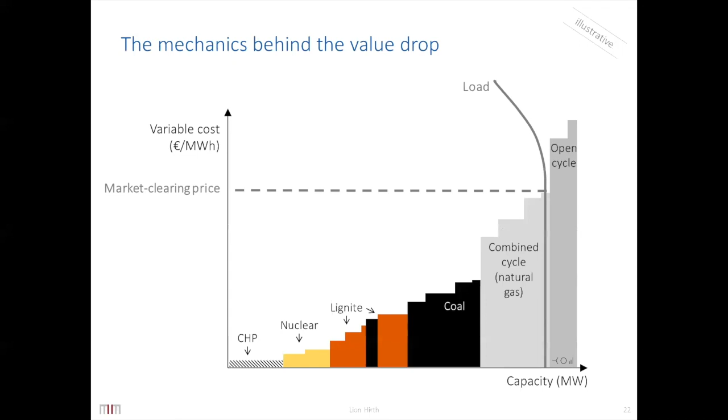If in that hour of the year additional wind supply comes into the market, the net load—which is load minus wind and solar generation—is reduced, and this net load is what needs to be served by conventional power plants. With reduced net loads, the price is reduced. Whenever wind power is added to the market, in that specific moment of time, the price is reduced compared to the same hour if there wasn't any wind.

Systematically, wind eats up its own price, an effect that my former boss used to call the self-cannibalization effect. I'm not sure if that's the nicest term, but in essence it's just simple economics: if you increase the supply of a good, its relative price goes down. In this case, the good is wind or solar energy, which makes it a little trickier to observe.

Obviously, the shift is larger if you have more wind turbines installed in that region. So whenever more wind power is installed, the stronger the shift of the price decline in windy hours is, and that results in the pattern you've seen—that on average over the course of a year, income declines with higher average penetration rates. So far, the bad news.

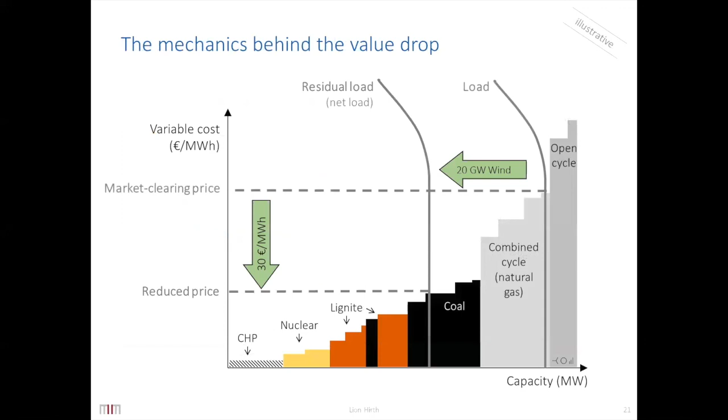I said if you extrapolate that linear trend, the picture would look pretty bleak, but extrapolating a historical trend is something you should never do if you want to make sensible decisions. So what we did to understand how this pattern evolves in the future is use a very simple numerical electricity market model that covers these regions.

It's a pretty simple but relatively standard electricity market model that also models investments—so it's a greenfield model. Under certain conditions, the model determines the cost-optimal electricity mix for Europe, both in hourly dispatch and investment in power plants. The model is open source, so you're invited to have a look and run your own model runs if you want to verify what I'm going to say.

What does the number mean? It means that at 30% wind market share, the value of each megawatt hour of electricity from wind is 40% less than the value of the first megawatt hour, when there was only one single wind turbine installed. That's quite a dramatic decline.

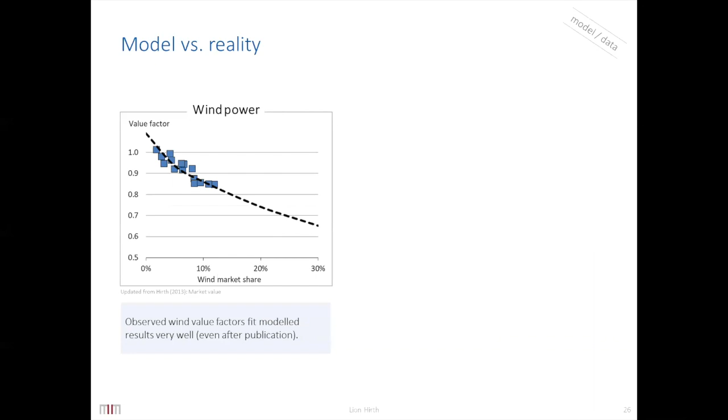Where does the difference between wind and solar come from? Sorry, there's a slide I didn't bring. But there are obvious solutions to that problem, if you perceive it as a problem.

Electricity storage is one solution. It's pretty clear that if you had unlimited electricity storage at 100% round-trip efficiency, electricity prices would be flat all the time—there wouldn't be any price fluctuations, because if there were any, people would store and generate electricity to make them go away. But we don't have unlimited, priceless electricity storage at 100% efficiency. Storage is limited, costly, and has losses.

So what we did was test the impact of doubling Europe's existing pumped hydro storage capacity. We ran three model scenarios: the first with existing capacity in place, the second with no storage capacity at all, and the third with double the existing capacity. The impact is as expected—if you have more storage, the value of wind (or in this case solar and wind energy) is increased.

But the key point here is that the impact is relatively small. So even if you double existing pumped hydro capacity, which is quite an investment, you still have a relatively limited impact on the value of wind energy. If you increase interconnection between countries, you get a similar effect, a little more. That's of course because there's geographic smoothing effects. Sometimes there's wind in France but not in Finland, and sometimes in Sweden but not in Switzerland. So if that can be traded more easily, things are smoothed out, which is good for the value of wind energy. But still, overall, it doesn't qualitatively change the picture.

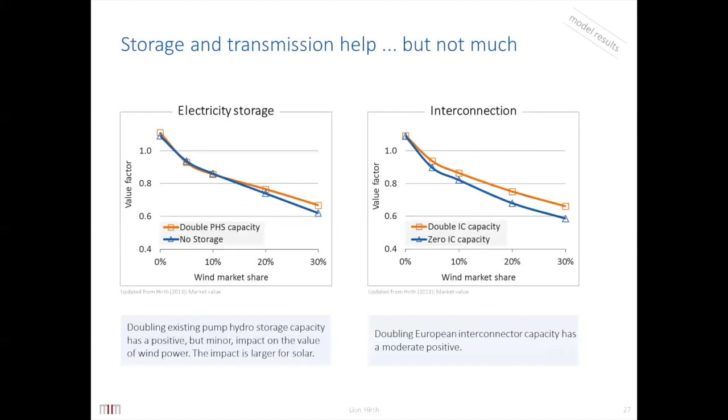Is the average value factor across all energy sources equal to 1, and therefore, as wind and solar lose value, are there other sources gaining value, and if so, what are those? It's not exactly 1, it's a little higher. The average is higher than 1. You would get a value factor of 1 if you had a baseload plant that runs 24/7, so a nuclear plant has a value factor of almost 1. But because there are peaking plants in the system that disproportionately produce at times of high prices, a peaking plant might have a value factor of 2 or 5 or maybe even 10. So the average is slightly above 1, maybe 1.1 in this region.

So that's essentially a storage technology, right? I mean the fuel is being stored, so it's a different storage technology that's winning the market from a value standpoint. You can see it like this, yeah. Depending how you define storage, but yes, in the sense you phrased it, yes.

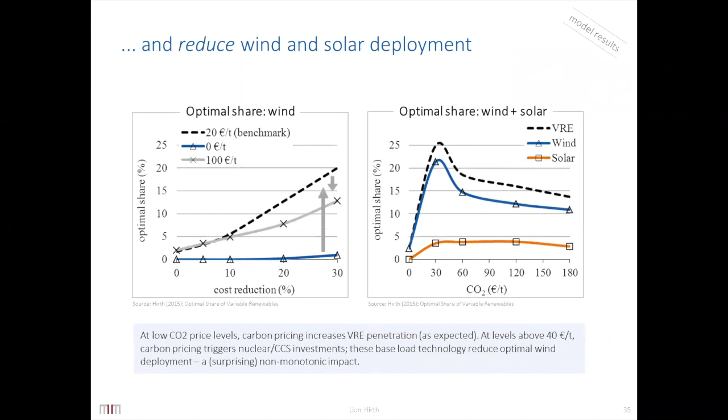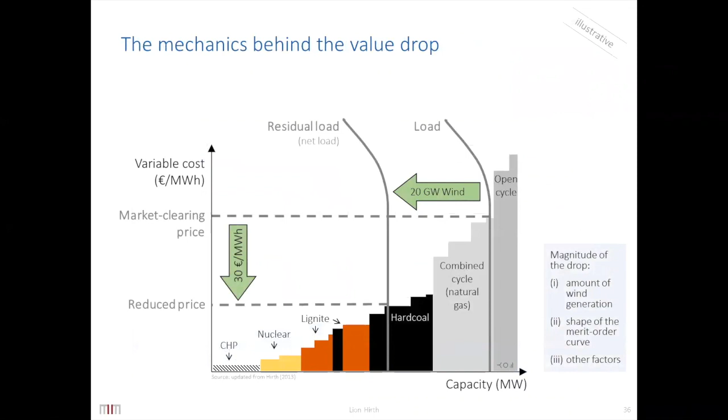Of course, if you look at this slide more carefully, the size of the price drop for a given volume depends on the shape of the supply curve, right? If the supply curve is very flat, there's hardly any price drop. If the supply curve is very steep or very convex, then the price drop is larger.

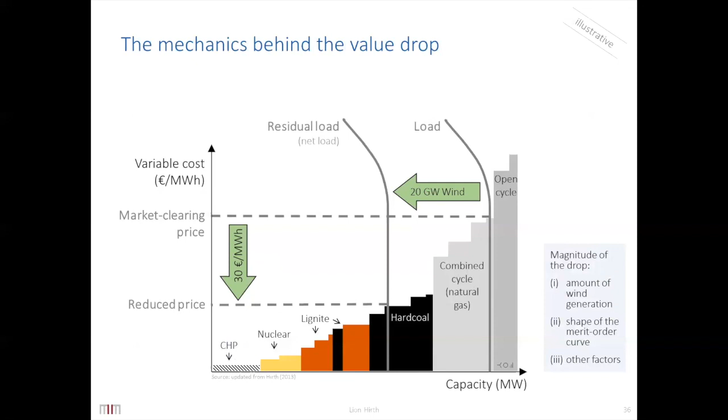So what happens in the model if you include a carbon price of 100 euros per ton? Recall that this is a long-term model, so it models the entire power plant fleet not as it is, but as a greenfield model that finds the least cost power plant fleet for a given assumption set, including carbon price. If you increase the carbon price to 100, nuclear power becomes competitive, which really wasn't before. So at 100 euros, you have a large nuclear fleet, and nuclear is very investment intensive but relatively cheap to operate, so it has low fuel costs.

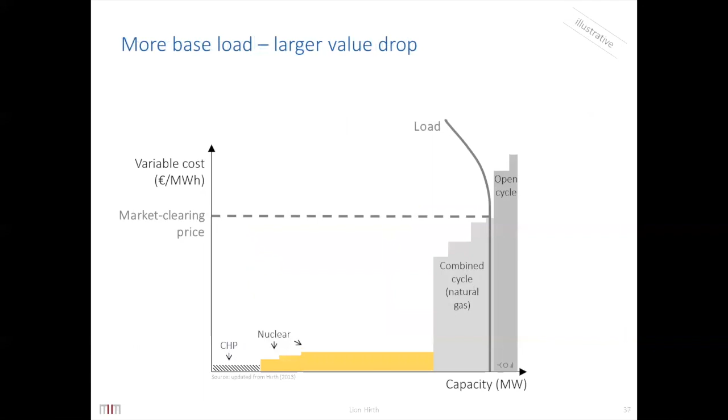So nuclear plants would bid at their fuel costs, and at the same drop in net demand that you saw before, this would lead to a much starker drop in prices because variable costs of nuclear are so low. This has that surprising result that the market value of wind is reduced by introducing carbon prices at high levels.

But of course, that mechanism rests on the idea that you can actually install nuclear power plants and that they will be built as a response to the carbon price. If it's not nuclear, you could also pick carbon capture and storage. CCS has similar cost characteristics, or more broadly, any other type of generator that's investment intensive but relatively cheap to operate. Any such low carbon baseload plants built as a response to a carbon price can have a negative impact on the market value of wind energy. That's a surprising mechanism I wasn't expecting, at least.

Put differently, wind and solar as variable electricity generators do not really go well hand in hand with baseload plants that need to run 24/7 to be economic. They go much better with generation technologies that are less capital intensive. Unfortunately, there aren't many of these less capital intensive, low carbon technologies available. Maybe biomass, maybe natural gas with CCS, but the options aren't great.

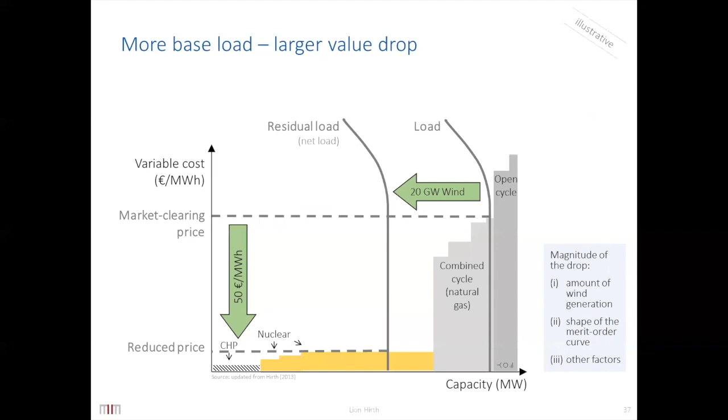Let's talk more positively about what we can do about this. There's a lot of things that can be done to make this value drop less dramatic, to mitigate it. This is grouped into two parts. First, things at the level of the power system and market to make it more flexible, to accommodate larger volumes of wind and solar — demand response, storage, more interconnection, making thermal plants more flexible, shifting the generation mix towards less capital-intensive plants, market design, and using flexible hydropower to the extent it's flexible.

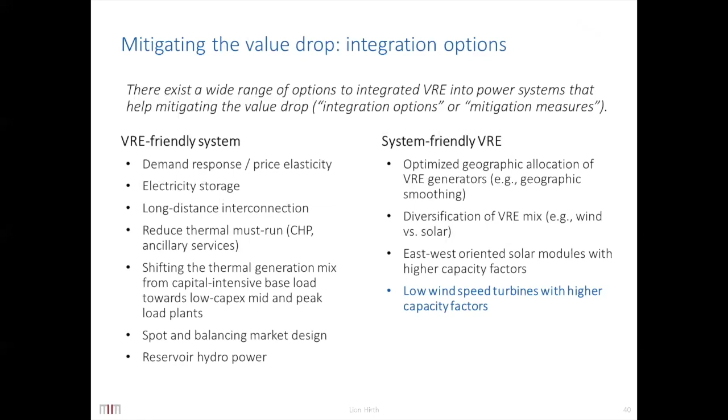And there are options at the level of the renewable energy technology and asset to make the renewable energy asset more system-friendly. One is changing the geographic location and diversifying the mix — having a mix of wind and solar rather than only one is obviously going to produce better results. But here we want to look at something less obvious: so-called low wind speed turbines that have higher capacity factors. So what is system-friendly wind power?

First on that terminology: we call these system-friendly renewables because they reduce what some people call integration or total system cost. Expressed differently, they increase the economic value of the electricity produced, and as a consequence might reduce the cost of support policies to deploy these technologies.

So what is a low wind speed turbine? It's a turbine that combines two characteristics compared to a classical turbine: lower power and a larger rotor per unit of installed capacity. Think of two turbines you can actually buy on the market — this isn't fancy future technology. You can call Vestas, Siemens, or Enercon and buy these. I'm comparing an Enercon E-82 with installed capacity of 3 megawatts and the Vestas V100 with 1.8 megawatts. You could pick other turbines; these are just examples.

These turbines placed at a certain location in Germany would roughly produce the same annual output of electricity, so in that sense they're comparable. But they are different: the Vestas has a smaller generator but a larger rotor diameter, while the Enercon has a smaller rotor and a larger generator. Whenever it's very windy, the Enercon can produce at full speed, 3 megawatts, while the Vestas can only produce 1.8 megawatts, its rated capacity. If it's moderately windy, the Enercon is limited not by its electrical capacity but by the amount of energy that can be harvested by the rotor size, and the Vestas, having a larger rotor, can harvest more energy. So the Vestas produces more energy at moderate wind speeds, and the Enercon more at high wind speeds.

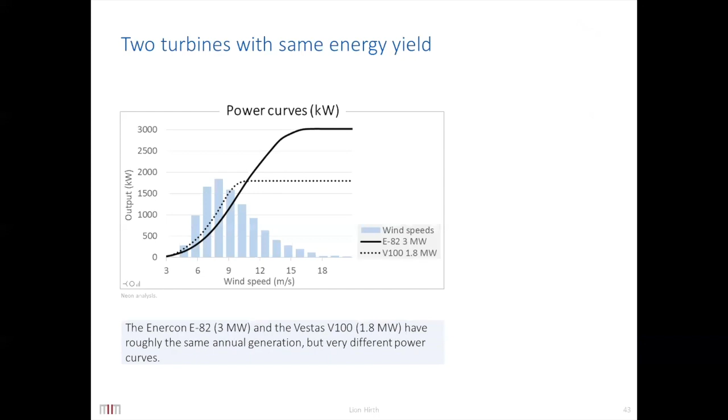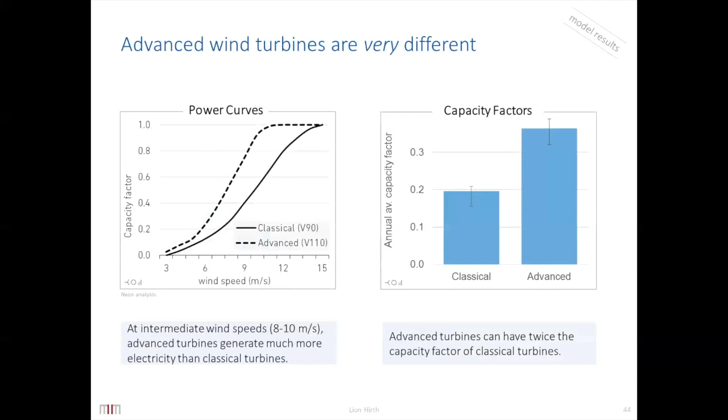In other terms, if you compare two turbines with the same rated capacity, normalized to 1, but different rotors, what we call an advanced or system-friendly wind turbine has a higher capacity factor than a classical turbine. These are real turbine models at the location we use to assess them, and these specific turbines had a capacity factor almost twice as high — slightly below 20% versus slightly above 35%.

The consequence of this turbine choice is that if you have a turbine — I'll use the terms classical and advanced, where advanced means larger rotor and classical means smaller rotor — these figures show two turbine fleets that again produce the same annual output. We're trying to compare apples with apples, to the extent that these are apples, producing the same amount of annual electricity. The fleet of advanced turbines has a smoother, less fluctuating output, because at high wind speeds it produces less, but at moderate wind speeds it produces more.

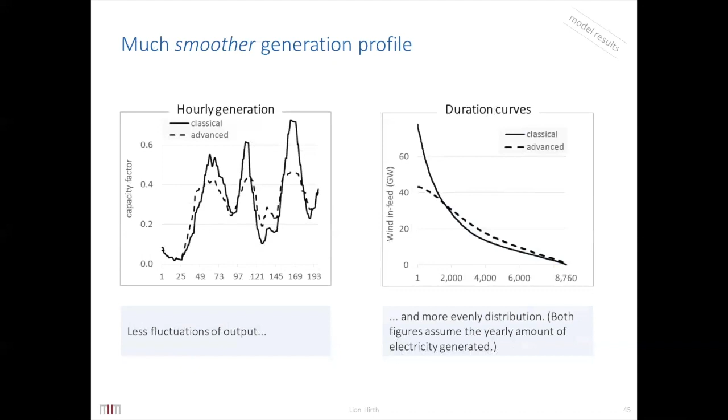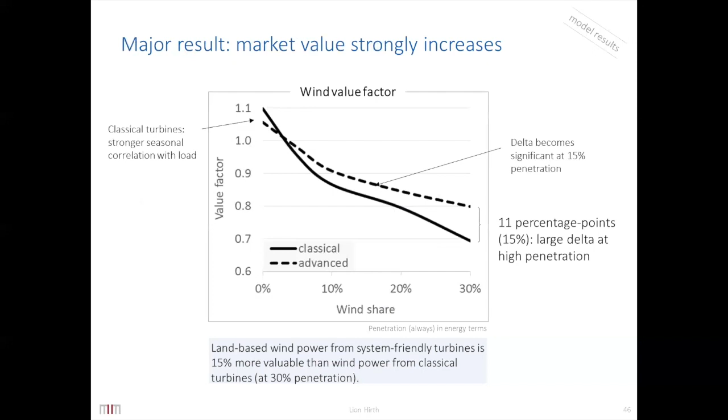revenue in value factor terms of a classical wind turbine, almost exactly what you saw earlier. If you replace that fleet of turbines with low wind speed turbines, you get a significant gain in value factor. According to these estimates, we have a 15% higher value per megawatt hour with these advanced wind turbines. I want to repeat: we're comparing two cases here. In both cases, exactly the same amount of wind energy is produced, just by different types of turbines. In one case, each megawatt hour of output is worth 15% more than in the other case. That's quite a lot.

There's quite some additional value coming in here because we produce at different moments and times. You can think about it along these lines: in some sense, a low wind speed turbine is shifting output in time. It's shifting output from windy times to moderately windy times, thereby helping reduce the price-depressing impact on power markets.

How does the capital cost compare? That's an excellent question. This paper has focused on value, so we don't compare costs. In fact, a lot of these wind turbines have been developed because they're cheaper.

Historically, they have not been developed because they have higher value, because in most countries we're not at 30% wind penetration, right? We all wish we were at 30% wind penetration, but we're not. We're somewhere here, and in this historical status quo, low wind speed turbines do not provide additional value. Actually, they sometimes provide less value. So they obviously haven't been developed to get this additional value.

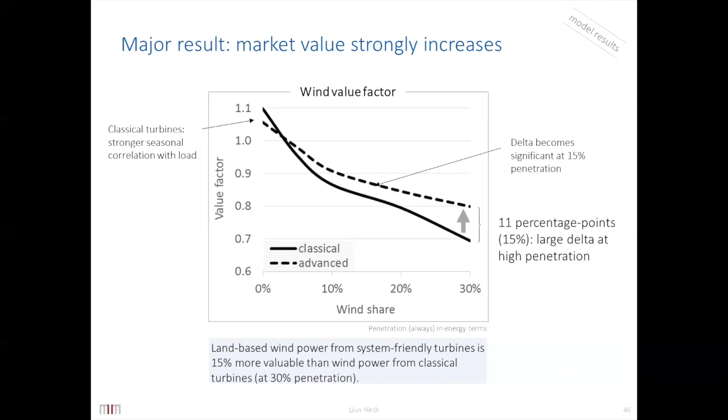That's not the only economic benefit that low wind speed turbines have. What I presented here you can call the increased value in bulk power earned from wholesale markets. On top of that, there's probably a benefit from reduced forecast errors, because it's easier to forecast production from a fleet of such machines, and you might also reduce connection costs and grid expansion costs, since it's the capacity, not the annual output, that determines some of these network costs.

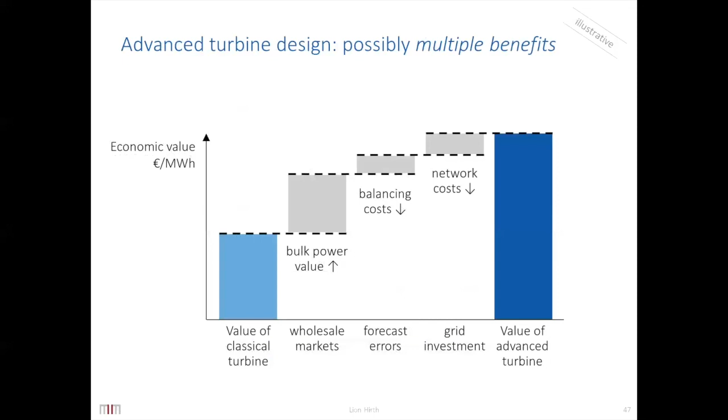I think we have relatively robust numbers here, but only very rough estimates of those, so I won't give you numbers because I don't think they're reliable. In the paper we speculated a little, but that's really guesswork. Overall, I think the direction of impact is clear: low wind speed turbines might be cheaper or more expensive, but at high penetration scenarios they really give you additional value from spot market revenues, and this comes on top of that. That should be considered by investors.

Well, is it considered by investors or not? That depends on policy and market design. I come from a country where for 15 years renewable energy was just paid a flat rate, a feed-in tariff, regardless of whether it was high value or low value. And guess what—if you pay the flat rate, you just want to minimize production costs, right?

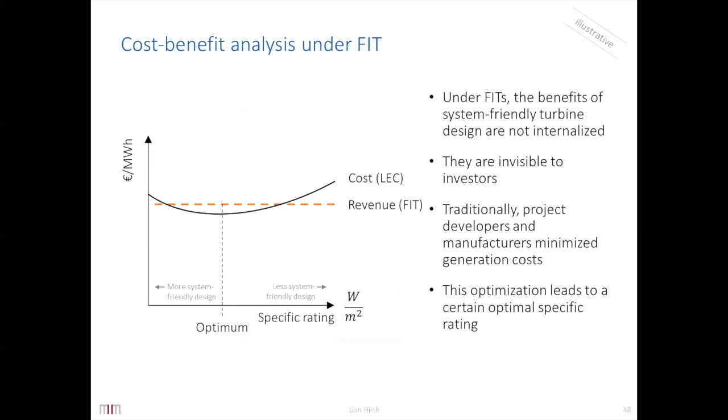So you find an optimal solution, and this is an illustration where you, as an investor, can choose specific ratings. You can choose to buy system-friendly or less system-friendly turbines, but what you choose will only depend on cost in LCOE terms, and that might not be the economically best option. Thinking of society, that might be another turbine. If this is the revenue or market value, and the market value represents the true socioeconomic benefit of the turbine, the best option would actually be this here, which is moved to the left.

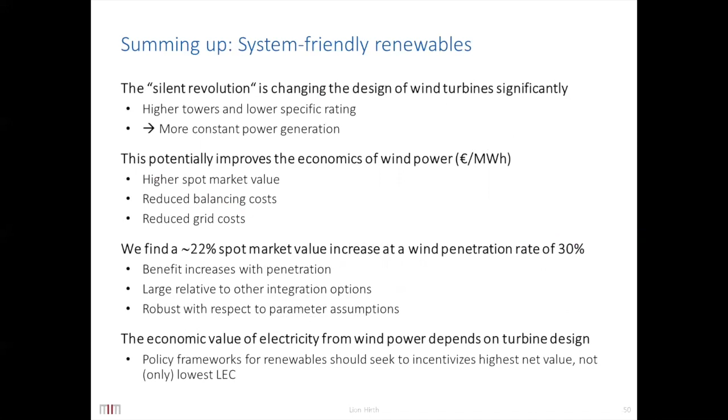The optimal option is more towards the system-friendly option, and you, as an investor, will only do this if you benefit from the benefits that society has. So, where do we have the policy implications of this?

What this work, I think, tells us at a very high level is that policy should acknowledge, not just verbally but in terms of policies and market design, value differences. The economic value of renewable energy and other energy depends on technology, design, and location. So policy frameworks and market design should not seek to get the cheapest renewable energy, but that renewable energy that has the highest net benefit for society, and that can be different.

Feed-in premiums and portfolio standards ensure that the scarcity signals from markets are seen by investors. A feed-in tariff makes the market invisible to investors, but feed-in premiums and RPSs allow market signals to be seen by investors, but then the market signals need to be right.